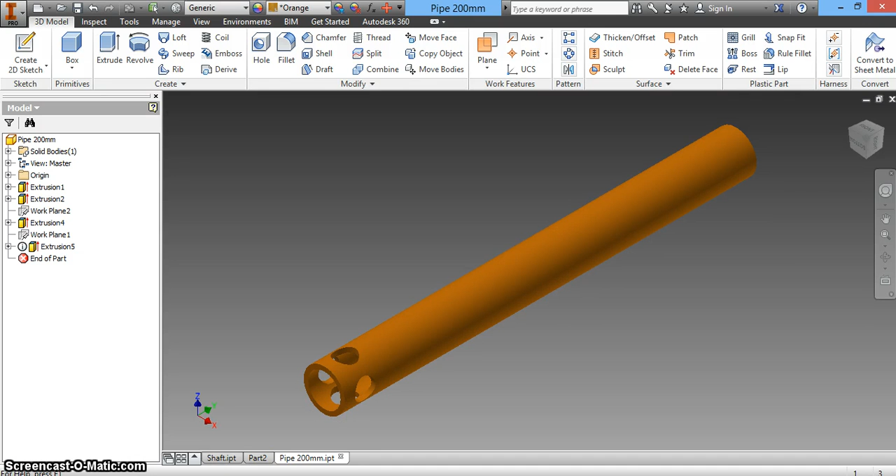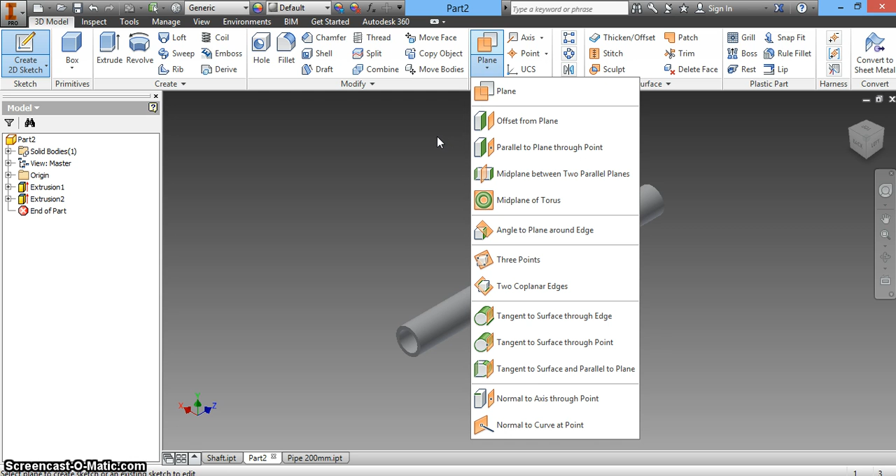So what we need to do is obviously drill these holes down the bottom here, but we run into a bit of trouble because we can't actually select a round surface to sketch on. So what we need to do is create a new plane, like we initially select to sketch on. For this, there's a drop down menu for creating planes. What we want to do is select the offset from plane.

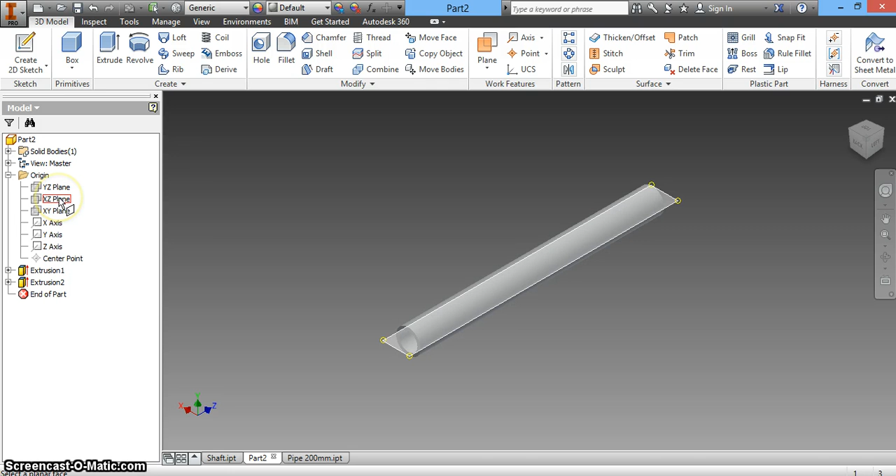Now we still can't select anything, so what we can use is the menu over to the left - see this little folder that says origin. Click the plus sign and then we can select these origin planes that we had. You can select either one of these two, the YZ or the XZ. I'm going to click the XZ just because I can.

And what we want to do is offset this plane 10 millimeters, which is exactly half of the outside diameter. So hit 10 mil and then hit enter. Now if I zoom in and go side on, you'll be able to see that that plane is pretty much sitting on a tangent to our pipe. Alright, so that's the next step.

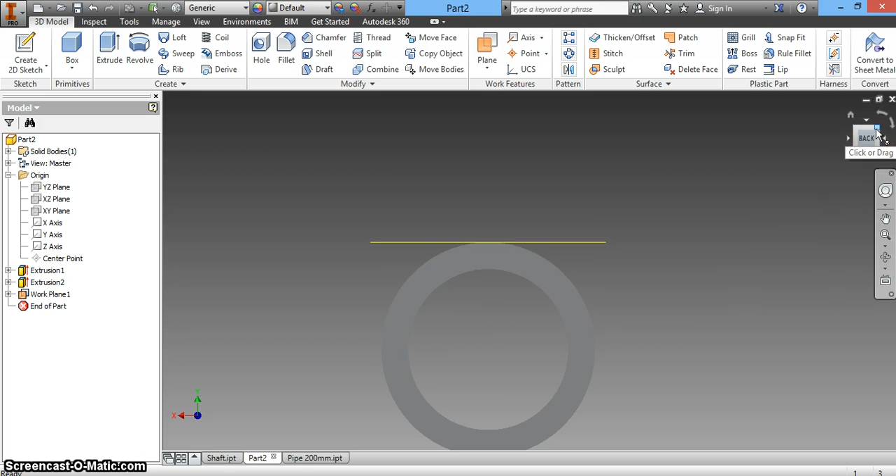So from here, all we do is now create a 2D sketch. Select the plane that we have just created. And then from here, we can create our little 10 mil inlet holes.

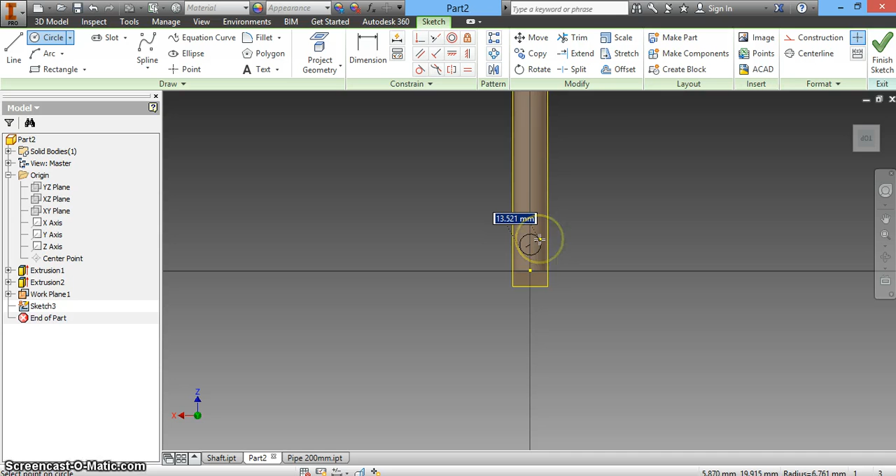So same thing again, we're going to go back to the trusty circle. Select that one, just hover over our little origin, but we're just going to come up roughly 10 mil. Alright, we can type in shortcut again - 10 mil for the diameter, and now see how it's still green, we want to make it blue again.

So all we do here is select the origin, and I'm going to zoom in for you because you're probably squinting right now, and select the middle of the circle and drag it out. So then just click 10 mil, and that is where our inlet hole should be.

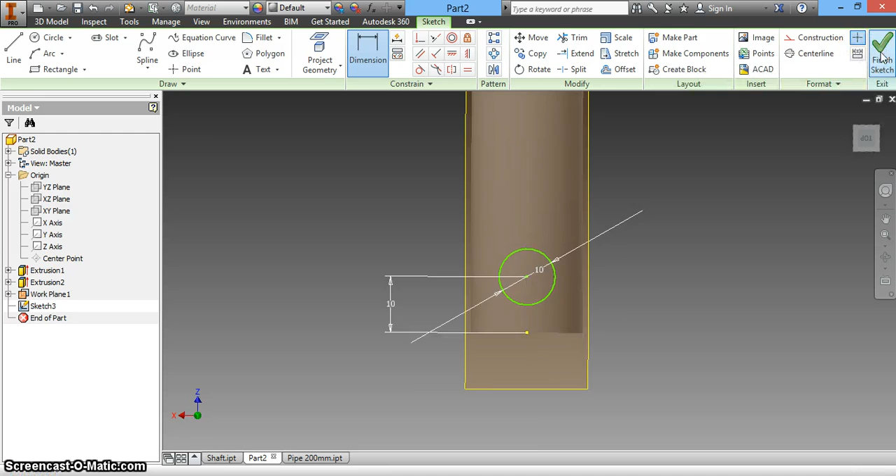So that is pretty much the sketch done. Now we can just finish the sketch and go back to our trusty extrude, and you can see there that it's joining on quite a big bit of plastic there, so we don't want to do that. We want to cut it through.

Now it's going to go a fair way through. We probably only need to make it go 20. That way when we zoom in and have a look at the preview, you can sort of see that it's cutting through just there. So that's that. Hit OK and we should have a hole all the way through.

Now if you want to get rid of that little work plane, what you can do as well is just right click on the menu on the left hand side and untick visibility, so you can hide that so it looks a little bit prettier. Alrighty-o, that's inlet holes 1 and 2 done. We'll show you how to do the other two next.